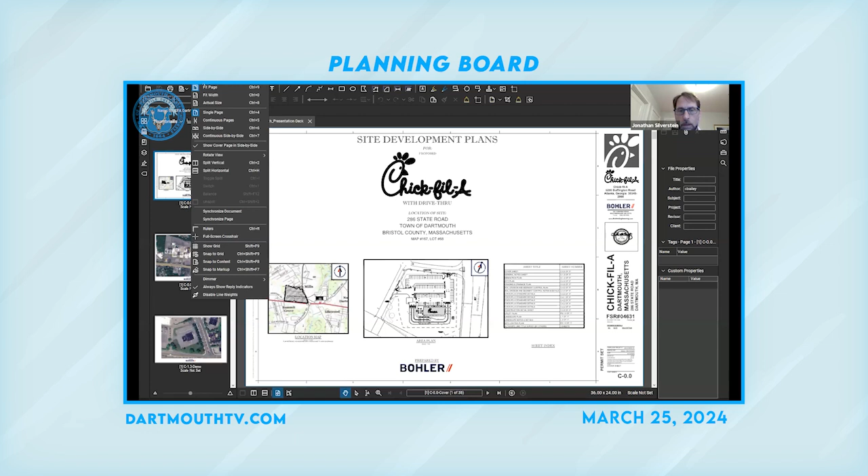The proposal is for a just under 5,200 square foot Chick-fil-A restaurant. It's going to have a drive-through. The drive-through has been constructed in excess of all of the standards set forth in the bylaw for design of stacking lanes and the rest of the requirements. The project will have 62 interior seats and 24 exterior seats, and as proposed, there are 87 parking spaces.

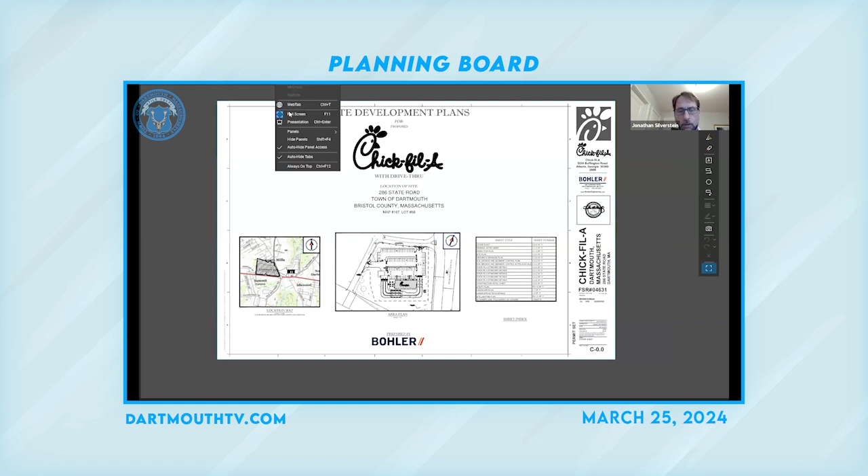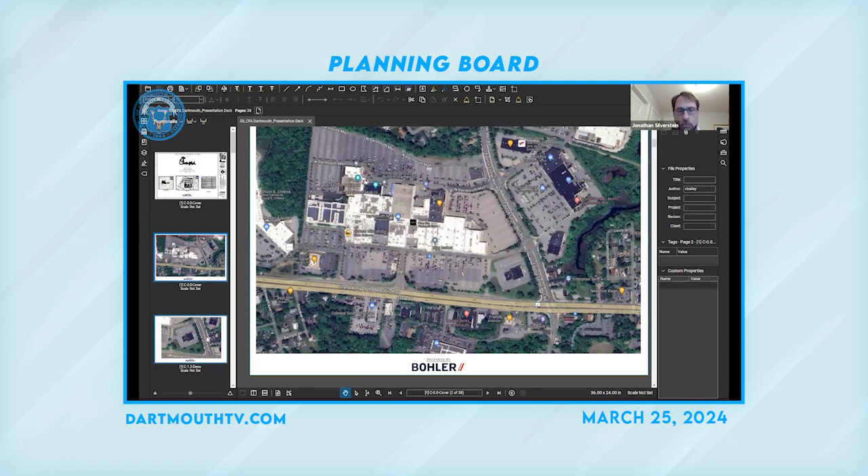The site is substantially covered as it stands with impervious area, and there'll be a significant reduction in impervious area as proposed, and Joey will run through that when I turn it over to him.

I know we did receive some comments, as Christine indicated, recently in terms of some of the performance standards set forth in the bylaw, setbacks for the site driveway, setbacks for some of the parking, and size of the parking spaces. I will note that all of those are existing nonconformities that are being significantly reduced. There's actually only one small, as proposed, extension of paved area in one corner of the site. Again, Joey will show you that, but by and large, that's multiple times offset by the reduction in impervious area as proposed.

So we know that this is the first of but not the last hearing session. Obviously, we're going to need to address some of the comments that we've received over the course of the past few days leading up to this hearing, and we're hoping that we can get some good feedback from the board tonight, and that will take us into the next hearing session. So with that, I will turn it over to Joey to run through the plans.

Great. Thank you, Jonathan. Again, my name is Joey Fonseca. I'm a project manager with Bohler. So I'm just going to take you through, Jonathan's already hit on a few of the points here, but I'm just going to take a little bit deeper dive into the existing condition, switch over to the proposed conditions, run through our proposal, the improvements. I'll kind of run through some of the architectural drawings that we have for the building, and then I'll end it by kicking it over to Maureen LePayton with Bowman to review the traffic portion of the site.

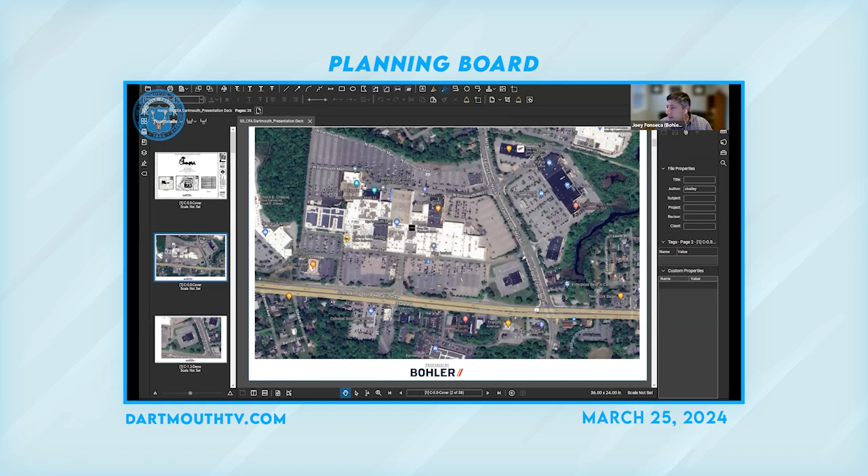So what you're looking at is just an aerial. You're all probably pretty familiar with the site. This is the Dartmouth Mall centered here on the screen, and our site location, I'll just highlight it here, is in this lower corner, on the corner of Faunce Corner Mall Road and Route 6. This is just a more zoomed in GIS picture of the site, again with the building, existing former Sears auto building here with the existing parking, again at the corner of State Road and Faunce Corner Road.

So as we mentioned, it's a former Sears auto site here. It's currently improved with about a 13,000 square foot single story building. It's a pretty large building, and parking field.

The existing parking within this parcel is about 103 parking spaces. We'll note that they're all roughly 9 by 18 parking stalls. Some are less than 9, some a little more, but I think it averages out to about 9 by 18 across the board.

There's 2 existing full movement driveways that currently service the site. One is on the west side that gives access to the interior ring road to the mall. The other, on the northeast corner, is another full movement driveway leading out closer to Faunce Corner Mall Road. Those 2 curb cuts, as you'll see in the proposed condition, will remain and just be slightly modified, and I'll get more into that during the presentation.

The grades on site are generally flat. It does slope from the northwest corner to the southeast corner. Grades outside of the paved area are pretty steep. This intersection is quite a few feet higher than the actual parking surface, and then it slopes down towards Route 6, and the roadway slopes down towards Faunce Corner Mall Road from this intersection at the northwest corner.

There is a section of the site within the Zone 3 aquifer overlay. It was shown on our site plan, though it's not highlighted on this plan, so I'll just draw it in. It encompasses this corner of the parcel, just so it's easier to see on screen. We're staying completely outside of that aquifer overlay with our proposed development, and you'll see some overlays showing the pre and post conditions and where the proposed improvements are relative to the existing improvements out on the site.

So as I mentioned before, everything in gray here is pavement that exists on site, with the building sort of being centrally located. It accounts for about 34,000 square feet of impervious coverage that currently exists out there.

Utilities are all serviced via mains within the mall, as well as the sewer line heading out towards Faunce Corner Mall Road and tying into the sewer service within that street. So all the other utilities are coming in mostly from the mall side, and then you've got drainage that is some collected on site and then sent off towards the southeast corner of the site.

Eventually it conveys stormwater towards the Paskamanset River that's off-site. Ultimately, that's where all the stormwater from this site, as well as a portion of the mall, conveys stormwater to. So this site has its own stormwater on site that discharges and gets conveyed off-site. It also has stormwater that is off-site, from the mall side, that passes through our site. Again, everything gets conveyed off-site towards that southeast corner of the site.

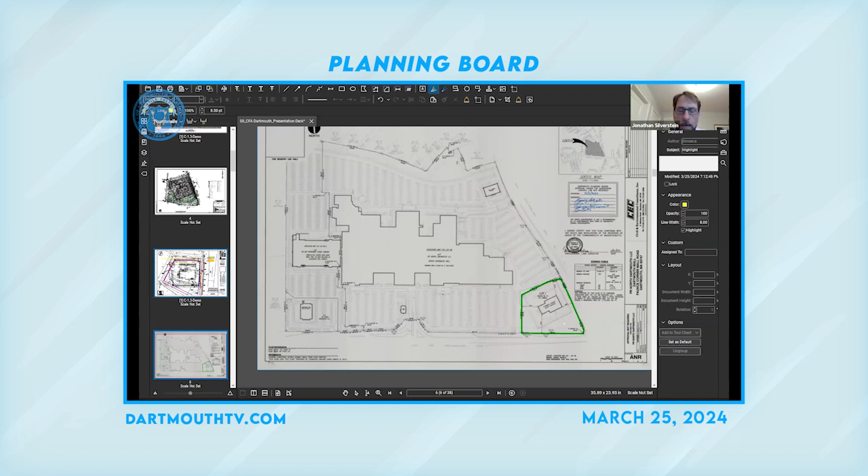Obviously, the board approved an ANR plan, which Joey's showing here. The ANR plan created this new parcel on paper, but all of the land is still in common ownership, so for zoning purposes it would not be considered a separate property. I think we weren't involved in that, but the landlord probably just did this to make it easier to identify the leased premises. For all intents and purposes, it's no different than any other part of the mall property, and it's still considered a single lot for zoning purposes, since you can't, through an ANR plan, create zoning nonconformities, which is what that would do.

Showing the creation of a lot that would result in zoning nonconformities means those are zoning nonconformities only in theory, and the courts have held repeatedly that those nonconformities don't actually come into existence until that lot is sold into separate ownership. So I just think that's a relevant piece of information for the board to have.

Thank you. So I'm going to switch over to the site plan now. We'll zoom out a little bit. This is just a color rendering with an aerial background so you can see the surrounding area and how this ties into it.

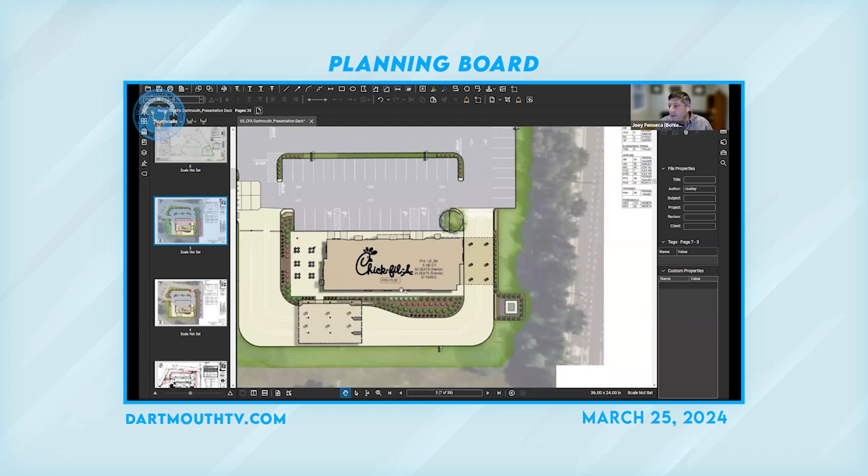Under the proposed conditions, the existing Sears building and parking areas will all be razed. We're proposing a new Chick-fil-A drive-through here, with a footprint area of about 5,200 square feet. The building is somewhat centrally located on the site, actually close to where the existing building is, just south of it. So where the existing Sears building is, in this front parking area right in front of the building, we're just south of it, generally in the same location.

The restaurant will contain 62 interior seats and 24 exterior seasonal seats. There'll be a patio on the left side of the plan for some seasonal seating. There'll be a 3-lane drive-through entrance which merges down to 2 lanes—3 lanes for ordering, then 2 lanes for meal fulfillment or pickup. We can run through that operation as well, but just wanted to highlight some of the features of the new plan here.

The parking field out front is designed for about 87 parking spaces. It relatively follows what the existing improvements were, although we've really reduced the impervious coverage here and brought in the site quite a bit to allow for additional landscaping in the parking area, whereas today this is all just one big paved area. I'll have an exhibit showing the difference, but we really wanted to introduce some additional landscaping here, knowing the site was mostly paved, which will also help on the stormwater side.

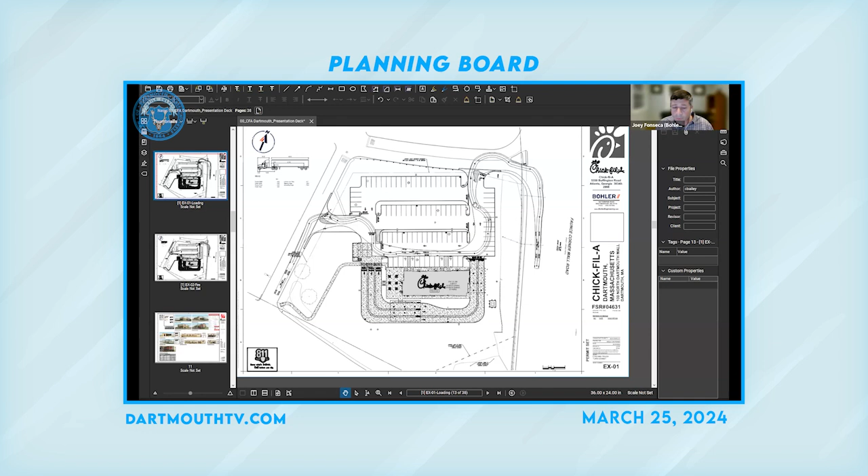Trash pickup and deliveries are all done off hours, so navigating through parking stalls won't be an issue, as they'll be operating when the store is not open, so there won't be any cars within those parking stalls — they'll be able to freely move through the site and exit. We also have, per the request of the fire department, they provided the specs for the fire truck, and we're showing a fire truck turn movement through the site — plenty of access to the building — and then exiting out onto Faunce Corner Mall Road.

Architecturally, I'll bring up the renderings that we have for some perspective views on the building. Let me just zoom in here. So these are just the various perspective views of the restaurant, showing color and the materials. This is the meal pickup side here on the top left — this is the canopy over the meal delivery area. This is the front of the store, we've got parking here, and this is the back side of the building. As you come around, these are the two queue lanes in the rear as you head towards the meal pickup area. Again, this highlights the back corner and the front corner here where the patio surfaces are for the outdoor seating.

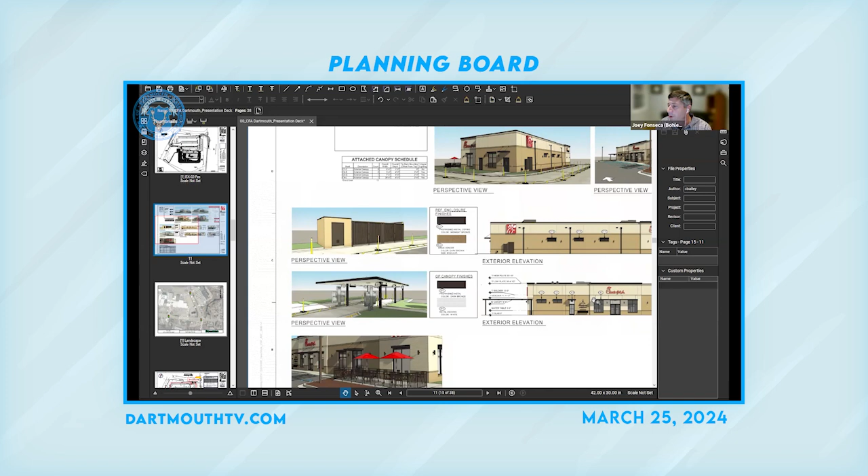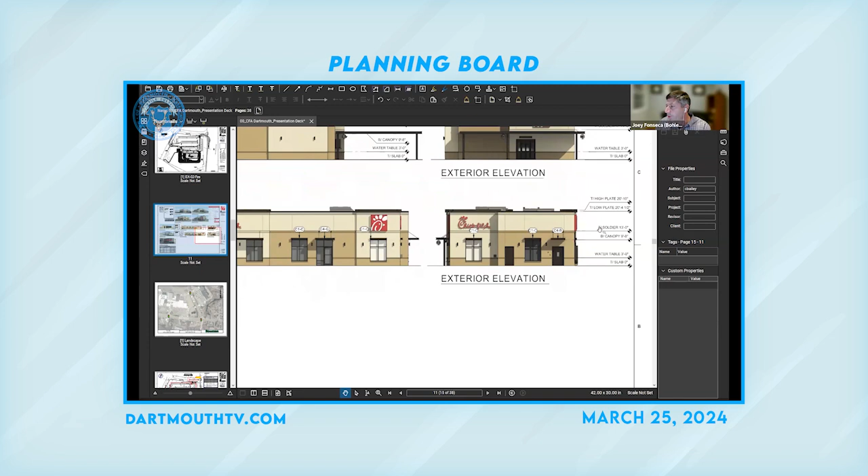It's a perspective view of the trash enclosure — probably one of the nicest trash enclosures you'll see. It matches the architecture, the brick, and the color of the Chick-fil-A building, so it will match that same look and character. And then again, just some renderings showing the order board pickup canopies as well as some additional exterior elevations for the restaurant. It's got an overall height of just under 21 feet. It's a single story building, so well within the height restrictions here.

I think that's really it from an existing conditions and site plan perspective. What I'd like to do is — I know that we've received comments through the portal — have Maureen present the traffic side, and then we can open it back up to questions, because I do have some exhibits to share that might answer some of those questions that came through the portal. So if everyone's in agreement, I can kick it over to Maureen and then we can wrap up with some questions.

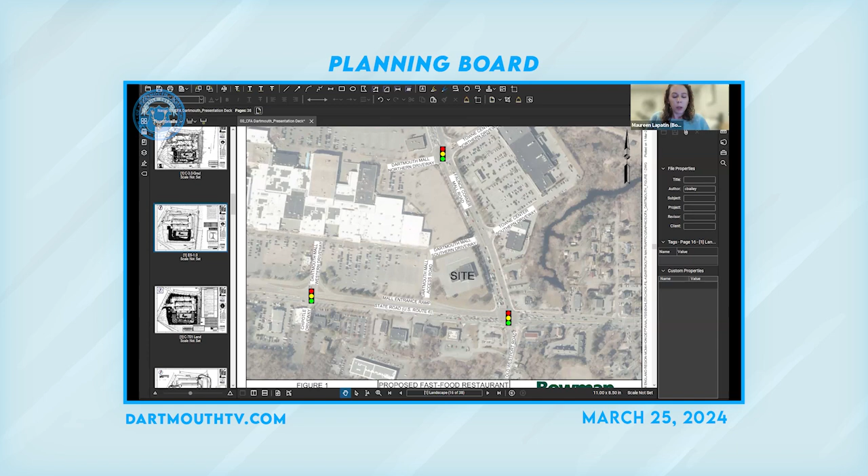We then use these base volumes to analyze our 2024 existing conditions, and build off of that to develop our future no build conditions and our future build conditions with the project. To determine our future no build conditions, we continue to grow those existing 2024 volumes based on a background growth rate. We used a background growth rate of 1%.

It's a fairly conservative growth rate. We confirmed that with the regional planning agency. And then we grow that over a 7-year timeframe in accordance with the MassDOT standards for traffic impact studies. So our future no build and our future build conditions are a 2031 traffic volume.

To develop the future no build conditions, we also take into account other planned developments or roadway improvement projects in the area that would be expected to impact operations at any of the study area intersections. We had coordinated with the planning department to determine if there were any other planned development projects in the area that would impact traffic operations.

Based on our coordination with the town planning office, there weren't any other planned developments within the study area, but we did identify the Mass DOT project on State Road between Faunce Corner Mall Road and the end limit, which is just off this screen at Hathaway Road.

That project is at the 75% level of design currently. And based on our coordination with Mass DOT, this project is currently planned for federal fiscal year 2025. So it would reasonably be in place before this project could be constructed and opened, or under construction anyway.

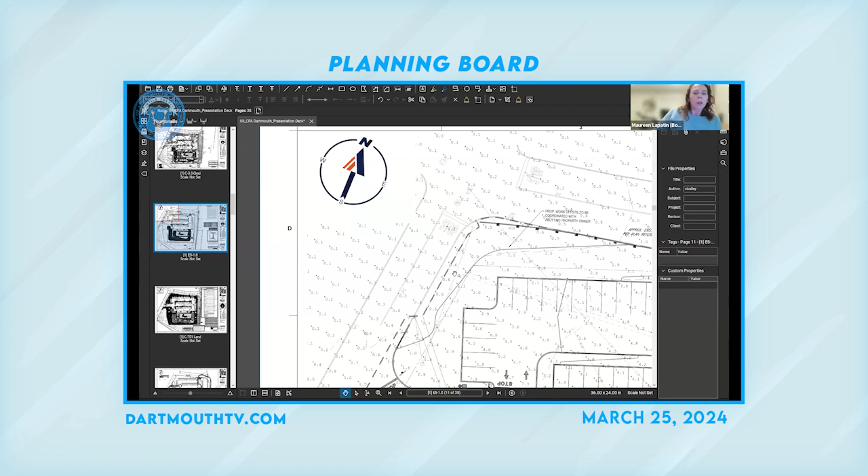Sorry, I was muted—thank you, Maureen. One plan I wanted to share that I hadn't shared yet is our overall lighting plan. We are proposing some pole-mounted lights within the parking area to sufficiently light the parking area. There's obviously lighting around the building, and some recessed cans within the canopy, so the drive-through is well lit, and our parking area is lit toward the minimum standards for parking area lighting, making sure our driveway curb cuts are well lit, and certainly within the site as well. I just wanted to make sure everyone was aware that we did have a lighting plan developed for the entire site, certainly within our improved areas.

That being said, I'll turn it back over to Jonathan for anything additional, and then we can kick it off to any additional comments the board wants to discuss tonight.

Thanks, Joey, and thanks, Maureen. I think that pretty much sums up the overview of the project. Again, this is really part of the overall mall property, and from a zoning standpoint, the ANR plan that the planning board endorsed doesn't change anything in terms of how it should be considered for zoning purposes. The landlord, if it ever wanted to sell off this individual parcel, would have to get zoning relief before doing so.

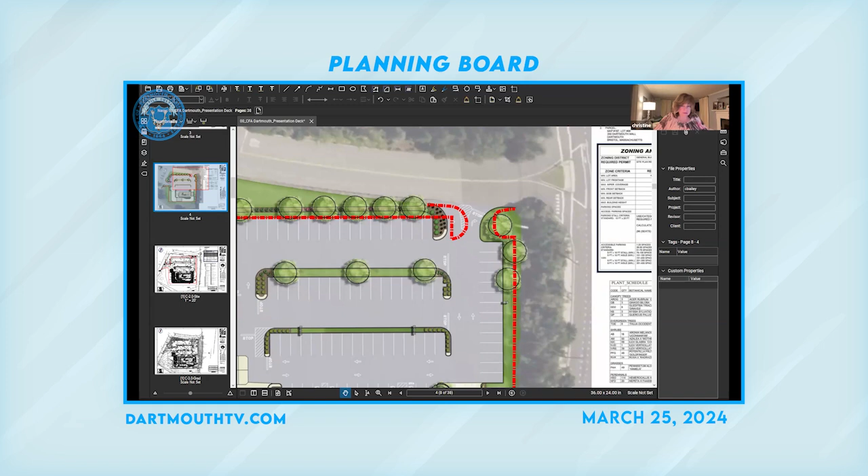You obviously show the stacking, but I was wondering if there was any consideration given to a bypass lane, in case somebody gets trapped in the drive-through there and needs to get out, if there's any consideration to that.

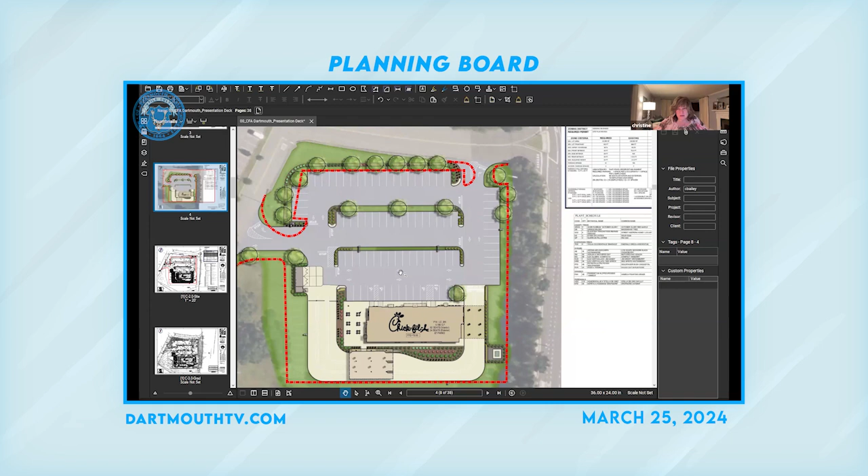One of the other things, I know what you said the existing parking spaces were, but if you're going to do work to the site, has there been any consideration to making them the standard now, which is 10 by 20 instead of 9 by 18, whether or not that was a consideration you were taking into account.

Since you have an overage of parking, I know you're interested in clearing out, and I think it's very wise to do some of the landscape along Faunce Corner Mall Road. I just want to point out that the town DPW director serves as the tree warden in this case, so he can work with whoever to determine which trees should remain and which can go within the right of way especially, because that is a concern to us, so we don't end up with something just generally cleared that we weren't anticipating.

As far as I know, the Board of Health, I had initially thought they were going to have concerns with regard to the trash. They don't seem to have concerns, and you've adequately explained that your pickup and loading are all off hours. So if you provide us with your hours of operation, or whatever you're proposing, that will solve that problem. I know they had also asked about what some type of water on plan 15 is, a shed with water, so they wanted an answer to what that is exactly.

DPW, you addressed the stormwater permit review, so you'll be working with them. They do the stormwater review on behalf of the planning board, so the board will ultimately be looking for that. The conservation agent, the environmental affairs officer, had wanted to find out about the discharges to the Paskamanset, because all of the drainage from the site ultimately goes through your site. So they just want to make sure it's noted on the plans accordingly, and you'll work with DPW and conservation on that particular piece.

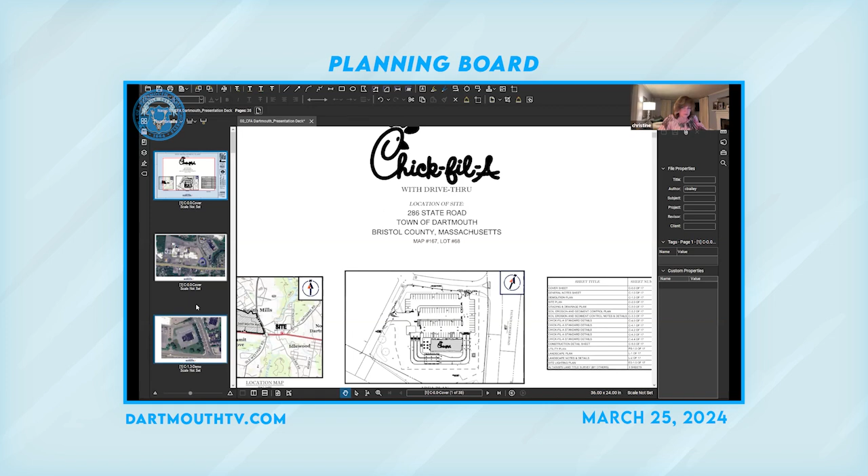I guess the only other thing was, we usually want a list of the waivers being requested on the front cover of the plan set, so that it stays with the plan set. And then the other thing I should point out to the planning board members is, because this new site was created, there was a new address given for this site, so it's not North Dartmouth Mall, it's actually got a state road address, as they had pointed out earlier. And again, that all ties into the fact that we thought the property was going to be sold. So those are the biggest things that I see.

Okay, Joe, can you do me a favor? Can you explain to me what the biggest challenges were when the owner, or the proposed investor, comes to you and says, this is what you got, work with it? I'd assume you've worked on these sites for Chick-fil-A in the past. What were the biggest challenges when you looked at this site?

Well, for one, it was access to the site and parking layout, and where the building needed to be for the drive-through operations, making sure we had enough stacking inside the site to not spill into drive aisles. We were limited, and we looked at many options on this site for where to site the building. Earlier in the process, the landlord had shared a document limiting us to where the building location, or building envelope, could be on the site. That forced our building further south, so the proposed footprint we're showing fits within that building envelope.

We had initially looked at an option where the building was closer to the north side of the site, with more of a counterclockwise layout, essentially mirroring the whole site. When we did that, we saw that, for the Chick-fil-A program, we want to make sure our drive-through operates per their standard prototype. This layout gave us the opportunity to really queue and get a good stack within the site, keeping customers within the drive-through lane and not spilling out into drive aisles, like some of our older sites where we weren't designing for these longer queue lanes.

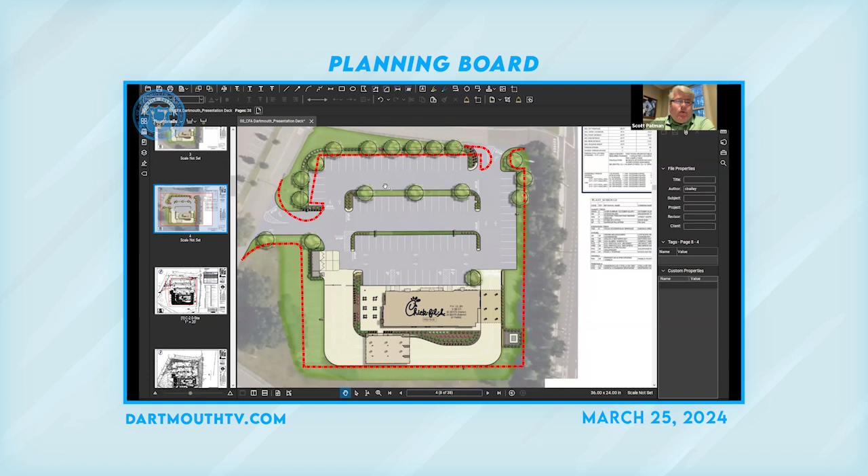That will answer one of your questions as well. We're doing a long-term ground lease with the mall, a 15-year ground lease with a lot of 5-year options to extend. There's no right to purchase in that agreement, so it will be a long-term ground lease. As with other leases, we oftentimes have certain restrictions on what we can and cannot operate, but those are very limited here, more centered around being isolated away from the mall. I could certainly get some of those for you if there was anything of concern.

Is there any restriction from the mall, Scott, that if we had overflow parking and people started to park in the other sections where the other tenants are in the main building, are there any restrictions there that would cause problems? In other words, do we have cross parking? I need to go back and look. Normally we would require cross parking here, but I want to make sure, since I wasn't the real estate counterpart here. I'll go back and look for sure.

If you can get us a little bit of information on the availability of overflow and any restrictions to this particular site for you from the mall ownership. I'm going to open it up to the membership if anyone has any questions at this point.

Chris, go ahead, you haven't asked this? All right, thank you, Mr. Chairman.

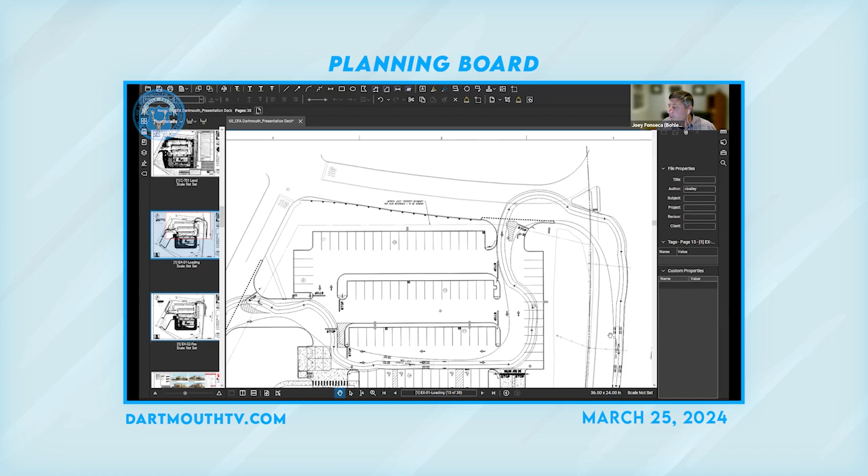So what Maureen and I were discussing last week was that we could have possibly a 3-foot wide mountable concrete island here that would extend beyond this, right onto the site, to again limit that turn. I think it would only be potentially 4 inches high.

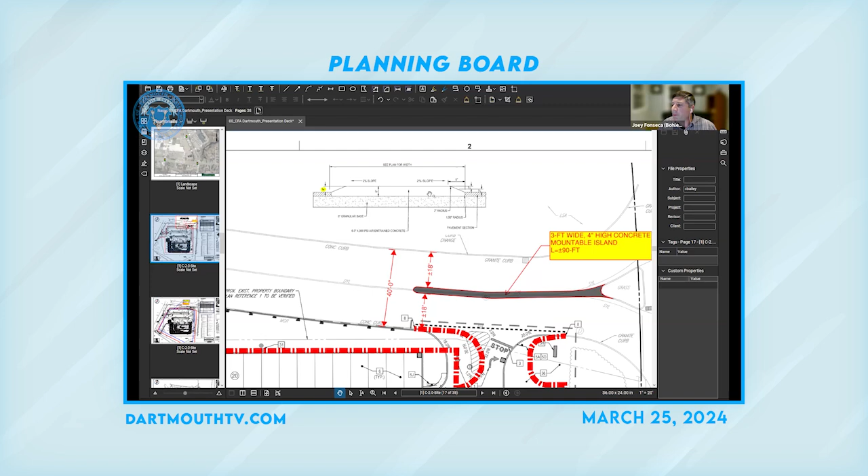This is a quick detail of what we've done on other sites. It's just 4 inches high, not a vertical curb. It's a mountable concrete island, but it will deter customers from taking that left turn, while also giving a fire truck apparatus or delivery truck apparatus the opportunity to still drive over that island as they make that turn and exit out onto Faunce Corner Mall Road.

Okay, but the intent is for that cut to be exit only, right? Correct. So this would restrict the left turn into the site and also the left turn out of the site. Okay.

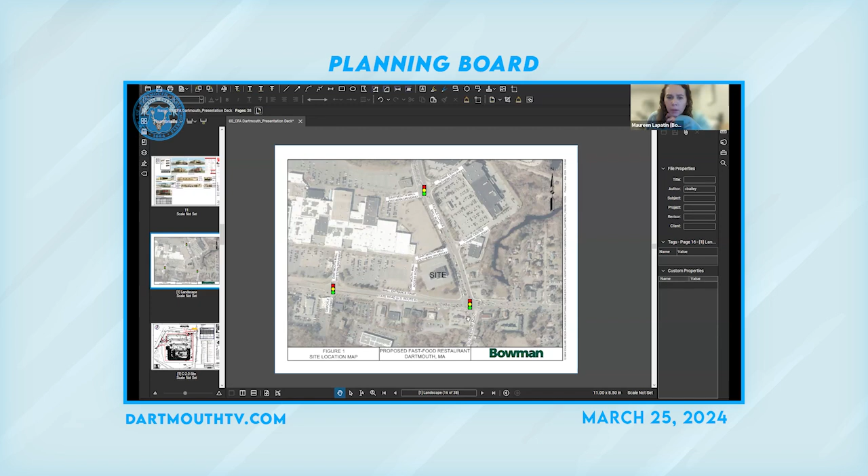Curiosity question for, I think it was Maureen from Bowman. Did Bowman do a traffic study for a similar application just down and around the corner on Route 6 and Tucker Road? I'm not familiar with that study you're speaking of personally.

Okay, because I think it was a Chick-fil-A. I'm not sure if it was the same entity we're dealing with today here. I was just curious. Not familiar with that specifically, I don't think. That was KFC, Kevin. Oh, KFC, okay, sorry, my bad. That's okay.

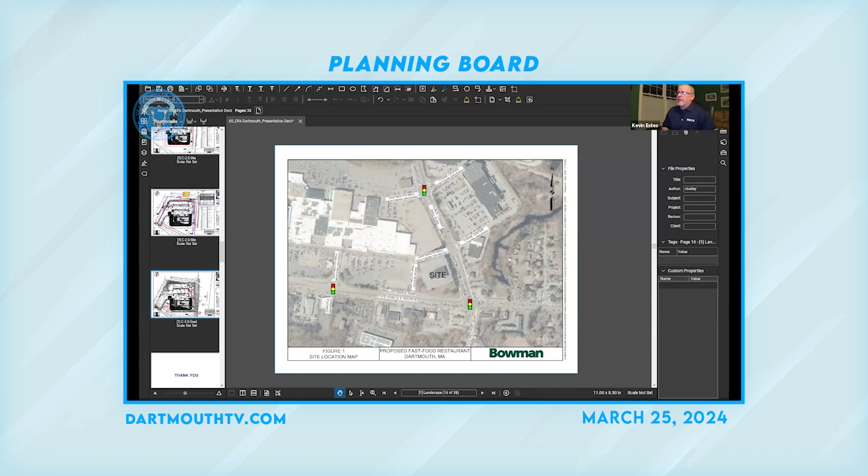So can you talk a little more about, besides the fact that we understand we're starting in a bad place in terms of impervious cover, and we appreciate the efforts to decrease impervious coverage, other than decreasing the impervious cover itself, are you taking any other water runoff mitigation efforts that don't currently exist there? I thought I heard you refer to some mitigation efforts beyond just increasing the pervious cover.

Yeah, so as part of the review with DPW, they wanted us to maximize on-site infiltration here as well as water quality improvements. With this site having a lot of utilities running through it, we faced some challenges on where we could potentially look at infiltration or subsurface infiltration, or even any surface infiltration like a surface basin. The grades here are really steep.

It's about a 10-foot grade change, and it's all dropping down towards Faunce Corner Road. What we've done here, by reducing the 14,000 square feet of impervious coverage, is get some additional infiltration there, reducing stormwater runoff. What we're working on now with DPW is isolating—

This is really confusing, but I can clarify what this means. We're isolating the proposed drainage improvements and keeping the existing drainage improvements as they are, because currently, even though the plans don't all jive together, there are some offline water quality improvements installed here. I don't know when, but there are some offline utilities here, and we want to make sure all of that is maintained—some coming from the mall, and some coming from drainage collected on site.

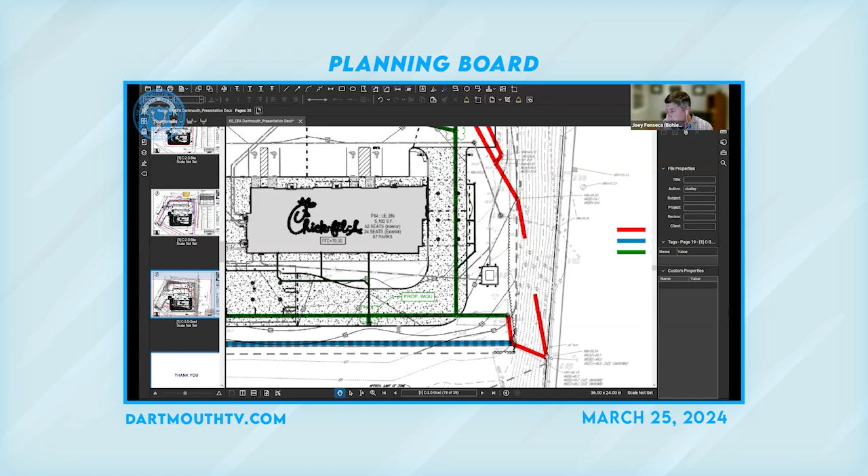So in red here indicates where the existing drain lines are through the site, coming from off-site into the site, being combined with other drain lines into manholes, and then everything is directed off-site into this bottom southeast corner. This portion is the larger 48-inch drain line that essentially, if I were to draw a line connecting these two, does this today. Knowing that we've got a building foundation footprint here, we've got some canopies and some footings for the canopy.

We didn't want to be excavated near that line. It's a pretty large line, 48 inches, with maybe only 3 feet of cover over it. We're proposing to relocate that line just south of our development to make sure it's out of the way. It's a large pipe, and we want to get it out of our way, and it's not impacting runoff rates or anything. We're literally just taking that 48-inch line and moving it south.

We're not changing any catchment areas. On site, as I mentioned, there are some existing drain lines coming into the site, combined into a manhole and then heading off site.

These areas here, where you've got this kind of offshoot, it's not clear through some of the plans we received, but I believe there's a water quality device here that's taken offline. There's a weir inside this catch basin, inside this manhole, that allows some of the smaller storms to direct towards the water quality device, get its treatment, and then it ties back into the system. Under the larger storm events, it's going to mostly bypass this and just head straight through the site and off. I believe that's how they were designed.

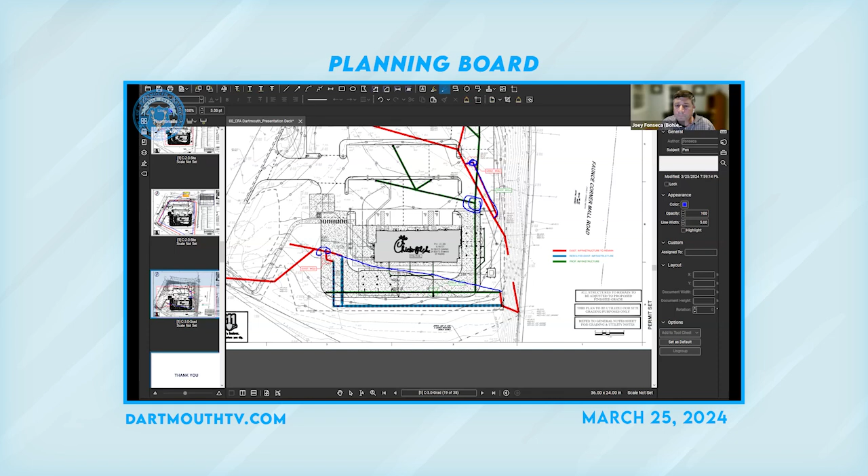Okay, Christine, so we're not deciding anything here because these aren't final plans. So I assume we're going to review this again. Yes, you're going to see this again. Okay, great, thanks. I mean, I assume that's where you'll all vote.

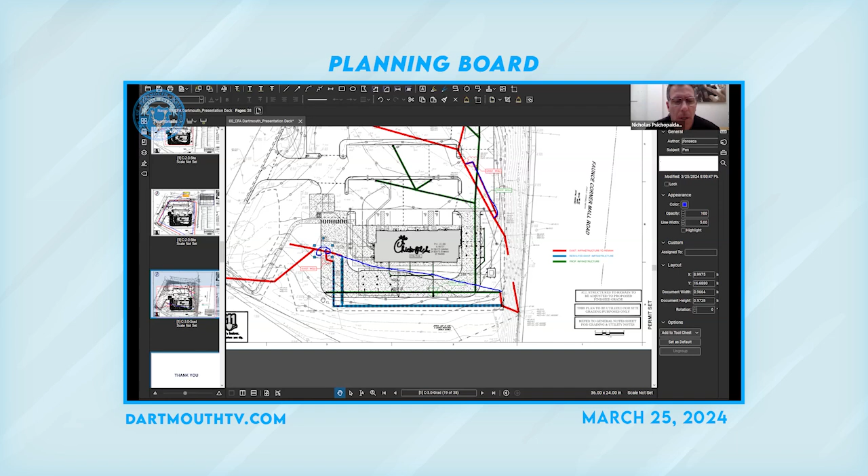May I ask a traffic question? Margaret, before you go — Nick, Margaret. Thank you, Mr. Chairman, I have a couple of questions.

I'm one of the members of the planning board, and I was thinking that perhaps you might have parking for a large bus. For instance, Coastline Elderly sometimes takes their people out for lunches, and some of the elderly from New Bedford and all — I know everybody's going to want to go to Chick-fil-A. So I know you have enough parking, but I'm wondering if you could designate one spot for parking for a large bus. That's one question. The other question I have is, is this a company store, Scott?

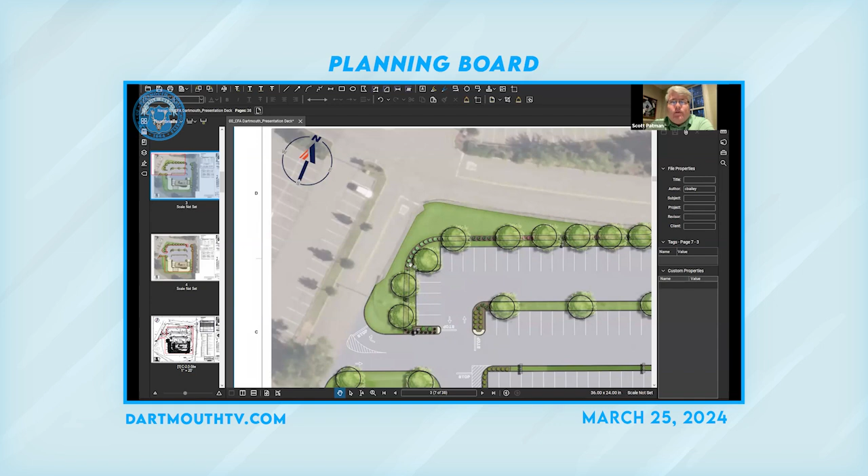So none of our restaurants are company stores. They're all operator driven. We call them operators, owner operators, but they're franchisees. We've got a unique model in that the corporation, Chick-fil-A Inc., does all the real estate and building improvements, and then we select operators to come in and be our franchise partners. It really is a truly unique model.

One of the things our founder did years ago when he started was he realized it's really too hard to run more than one or two restaurants. So we limit that. Across our chain, no operator has more than 3 restaurants. There are a number that have 2, but the majority of our operators only have 1 restaurant. The intent is that they're in the restaurant running that business and being part of that community, having an impact on their team members and their customers. So that's really the model.

We're also unique in that other franchise concepts have a huge cost of capital to get into those opportunities. With our opportunity, once they're selected, they put down a $10,000 deposit, and then we help them get trained up, staffed up, stocked up, and ready to open, and then it's their restaurant to run. So those are 2 of the unique model points.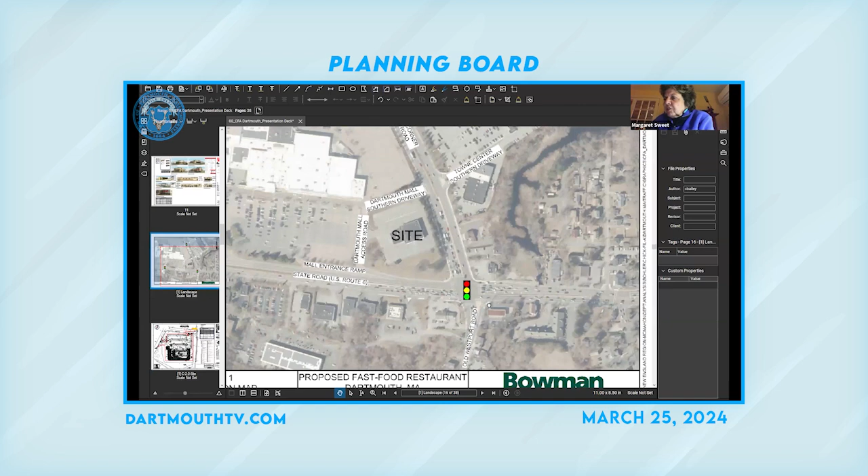Thank you. I have a question for the traffic study. That's a horrendous corner of State Road and the Faunce Corner Mall Road. And I'm wondering, have they done other hours of operation? In other words, sometimes between 2:30 and 3, because I'm out a lot driving, you can't even get through. Have you studied other hours, or are those just the peak hours that you picked up?

So when we do our peak hour counts, we could do several kinds of counts, but we typically cover several hours in the morning, midday, and afternoon, so we can determine, say between 4 p.m. and 6 p.m., or between 6 a.m. and 9 a.m., what the specific peak hour is based on the data we collected during that time frame. So we pick the one highest hour over a group of hours that we count.

From your traffic counts? Yes. Okay, thank you. And signage, we select the hours too based on anticipated peaks to the site as well. So Chick-fil-A does serve breakfast, but it's expected that the midday trips are typically the higher ones.

So for this specific kind of use, we would look at a weekday midday peak hour as opposed to earlier in the morning. Then we look at the weekday afternoon as well as the Saturday midday to align with those projects. What would your peak hour be during the week? Let me flip back to the traffic study so I can get that number for you quickly.

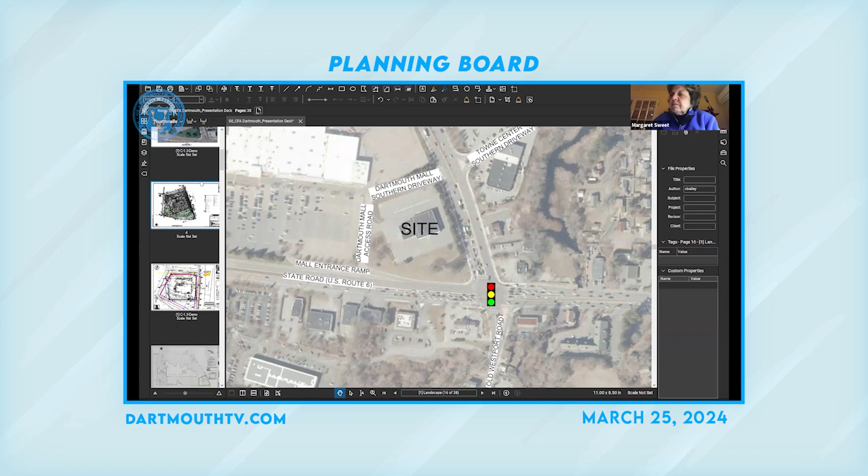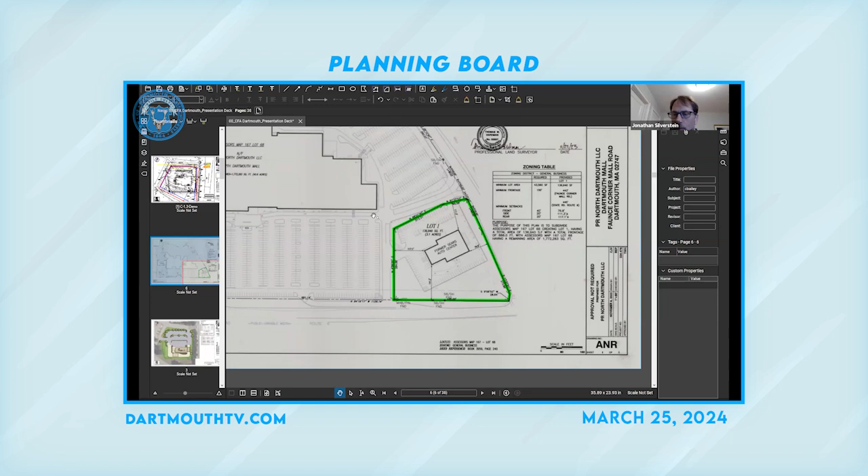I can make an educated guess just from having done this long enough. I think they were probably trying to do some of their own site planning, knowing this ground lease was going to be in place. I think it's significant that the line doesn't align with the roadway - it aligns with the existing parking in that northwest corner. So I think they were just trying to delineate the leased premises more than anything else. People do ANRs for all sorts of reasons, sometimes to get zoning freezes, sometimes to get a separate address. Maybe that was their intent - just so this could have a separate and less confusing address.

But we are aware of no intent on the part of the landlord to sell this parcel. And as Scott indicated, we certainly are not intending to purchase it - we're intending to lease it long term. Thank you, Christine.

Do you know if this ANR was recorded at the registry? Yes, it was. It was recorded at the registry.

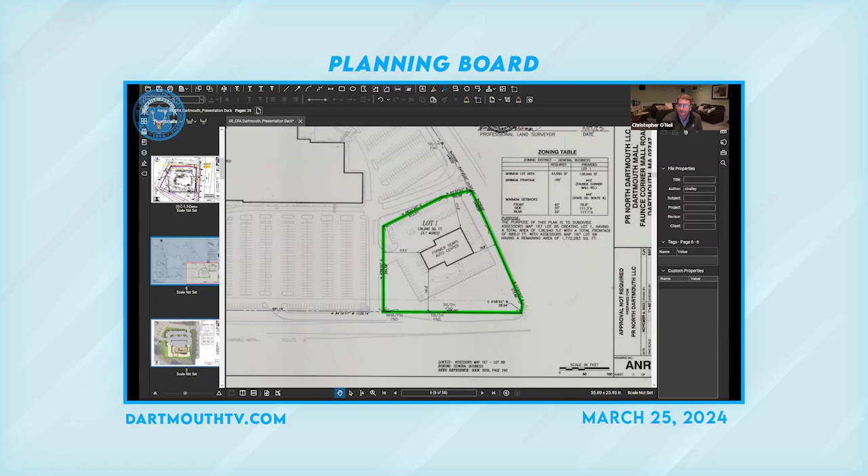Thank you, Myra. I have the book and page in the office if you want to look at it tomorrow. No, I'm fine - I just wanted to know if it was recorded.

Kevin, Nick, any questions? Yes, please, Mr. Chair. Oh, go ahead, Kevin. No, go ahead, Nick. You were next.

Thank you to all of you - appreciate the presentation and thrilled to see such potential enhancement of the site. In regards to Margaret, aside from the example she gave with Coastline or adult day services, keep in mind we've got 2 high schools nearby that commonly, multiple times a week, have a visiting high school bus or even a coach bus, and teams that travel look for food after the game. So you'll probably see school buses and coach buses on site in the evening hours, more common than not, based on the high school athletics and club athletics in our area. I'm only sharing that to support Margaret's request for bus spacing.

But my question was specific to simplifying the traffic study results, which was well revealed to us. I'm asking myself how I'm going to speak to the residents tomorrow when they approach me with questions. So I'm going to ask you a question to help myself: can you tell us how many vehicles you expect to access the site per day on average, to simplify the matter? And is there data that suggests how many of those vehicles, in count or percentage, currently use these thoroughfares on a daily basis, so we as planning board members can simplify what the traffic impact is going to be as we speak to residents? Quite frankly, as this presentation has gone on, my phone hasn't stopped beeping with questions about Chick-fil-A. Is there any way to share that information with me?

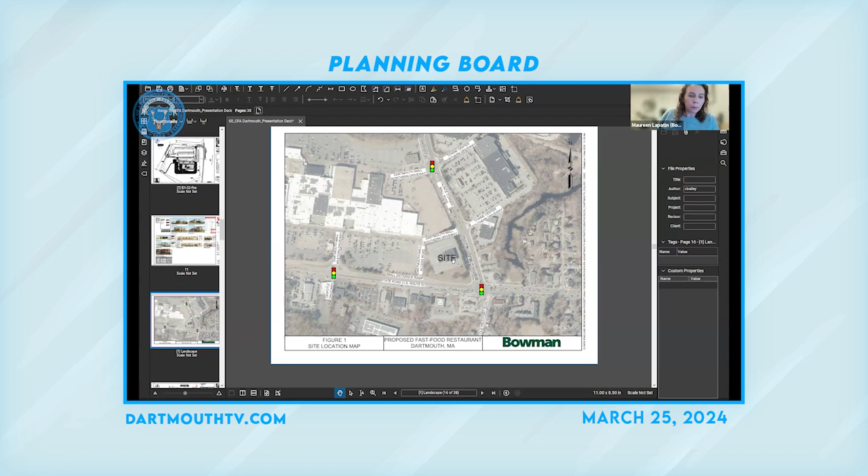For the trip generation, it's page 18. And for the distribution, it's page 24, figure 8 in our traffic impact study, called direction of arrivals and departures. That shows a percentage on the study area roadways of how much traffic already uses those roads, and that's how we determined primarily how to distribute those new trips. I believe all of that is in your packages.

I did not give them the whole study, just to give the planning board members, but I do have it if any of you want it. We were just trying to keep the package down, so we didn't give them all the appendices, but if you'd like it, I can distribute it to all of you on public access tomorrow. But you do have the pages that she referenced.

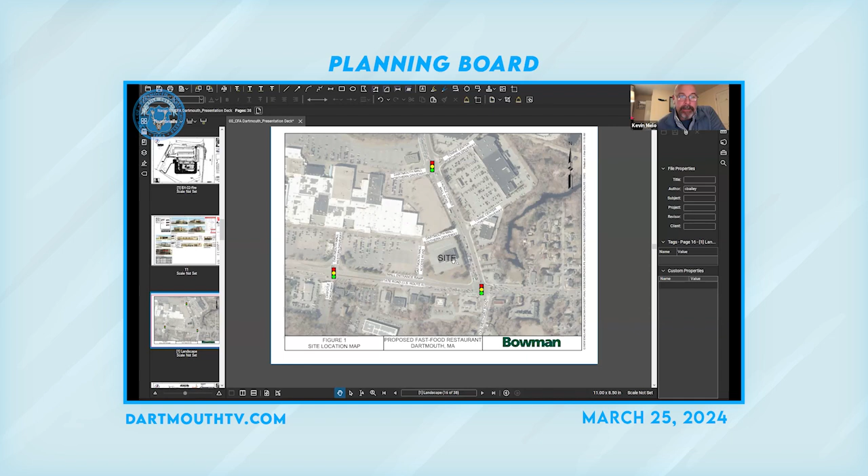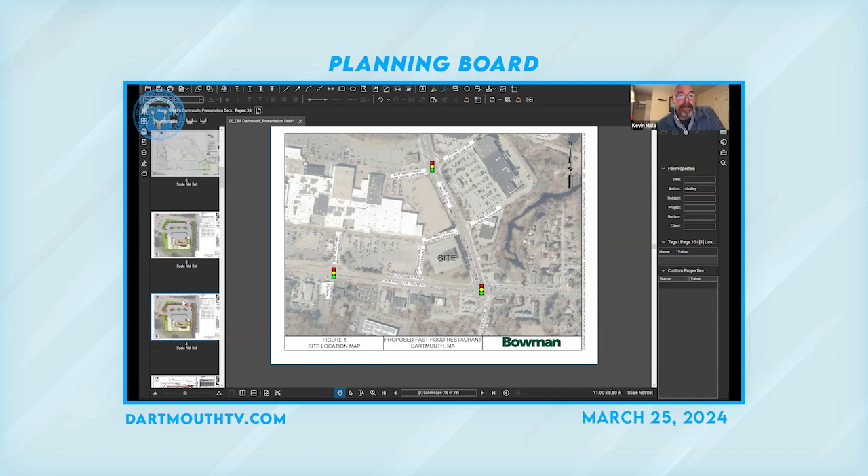Okay, so thank you. One thing I'm noticing about the plan that I'd like to see would be crosswalks marked from the front or the main entrance to the planning site. I don't know, did I miss that?

Yeah, so I'm not seeing crosswalks anywhere here. Right, so that was one of the pedestrian comments that we gave, but they haven't had time to respond to that yet. That is one of the requirements of Article 24, along with the bicycle rack, I would assume.

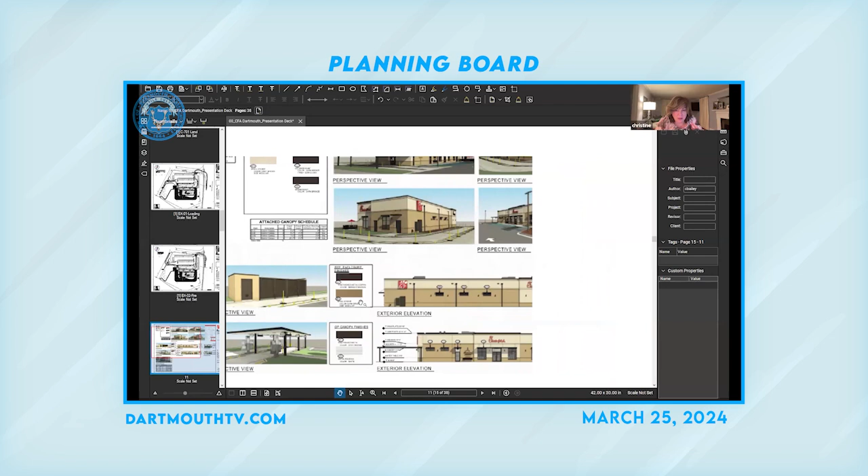Yep. And the other question I had is the architectural design standards for the town of Dartmouth. Has that been provided to the applicants? So that is available online. They did give us their standard concept.

We did not give them any feedback on that. I left that up to the planning board members, because they are just guidelines as to whether or not you're looking for anything in particular. Well, so that can be part of the feedback.

So I know when Friendly's came, when several other restaurants came with their quote-unquote corporate design, we did not just say, oh, okay, that's corporate, that's the way it is. I personally would be looking for some type of softening of these hard edges, if you'd say, on this building. I don't know what the other board members feel, but I think that's important, especially on such a prominent corner uptown. Everyone coming to UMass Dartmouth is going to see it.

And we did it with Bob's Discount Furniture. They gave us some peaks over the doorways, a little 3-dimension. I'm not asking for wood shingles or anything like that, like as if we were Cape Cod, but I'd like to see this building a little bit less boxy and a little bit more Cape Cod or New England style, something. I will forward the guidelines again tomorrow, the first time. They did not receive feedback on that.

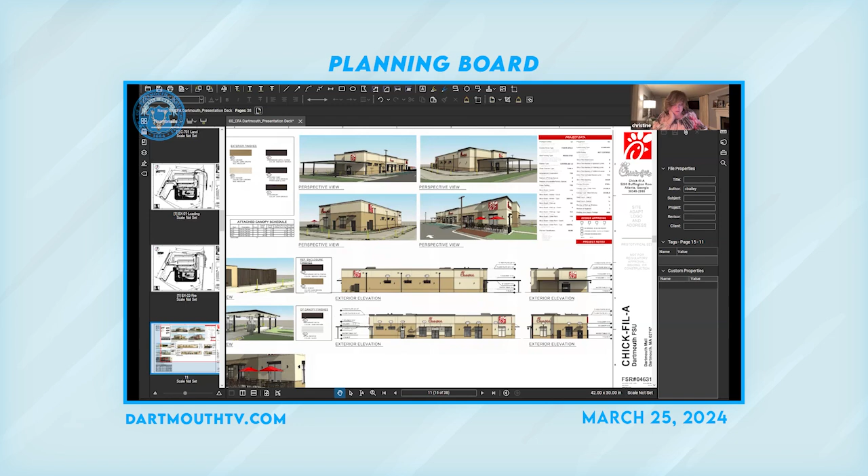Christine, the comments from the fire department, what did they have to say? The fire chief always refers to something in the site plan review regulations: provide a fire apparatus access plan, which includes an analysis and evaluation of fire apparatus maneuvers via the 2 access roads created by swept path analysis and turn simulation software. He also refers to 527 CMR 1 section 18.1.1.4 - aerial apparatus length is 40 feet with an axle to axle length of 21 feet 5 inches. Plans need to be revised to satisfy these concerns.

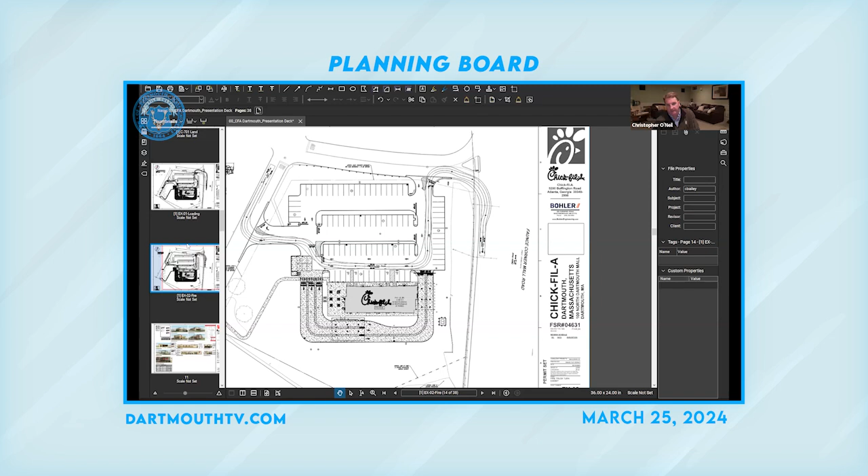This is pretty standard, what Chief Arruda gives every time, right, for everybody. Does this plan in front of us adhere to those standards? Not yet, Jonathan - these plans will have to be revised to include whatever the chief needs. The chief will be looking at it again when the actual building permit application goes through, and there may be some additional things that happen as a result of that review.

By the way, this was forwarded to the new building commissioner who started today, so he will be reviewing it and giving comments as well, I would imagine, over the next couple of weeks.

Joey, on that particular building layout, where's the kitchen? Which side is the kitchen on? The kitchen is all on the right side. The dining is on the left.

And just to add, this truck turn exhibit wasn't submitted as part of the original package, so this will get included once we have the revised plan set. So it's on yours, just not on ours - correct. And the chief hasn't addressed access to the rear of the building then.

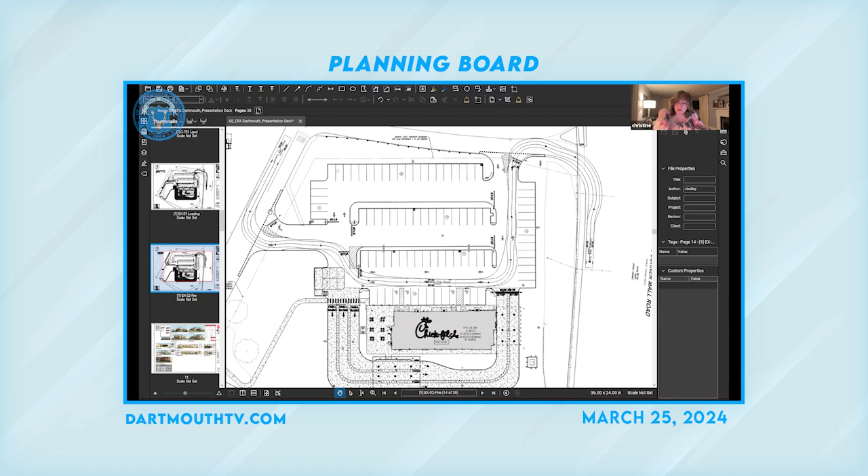No, he has not at this time. His comment is available on the portal, that's the only comment he gave us. I'm not sure if he was present at the technical reviewer meeting, I can't quite remember. Usually he does always give feedback and comments, so I can verify with him again.

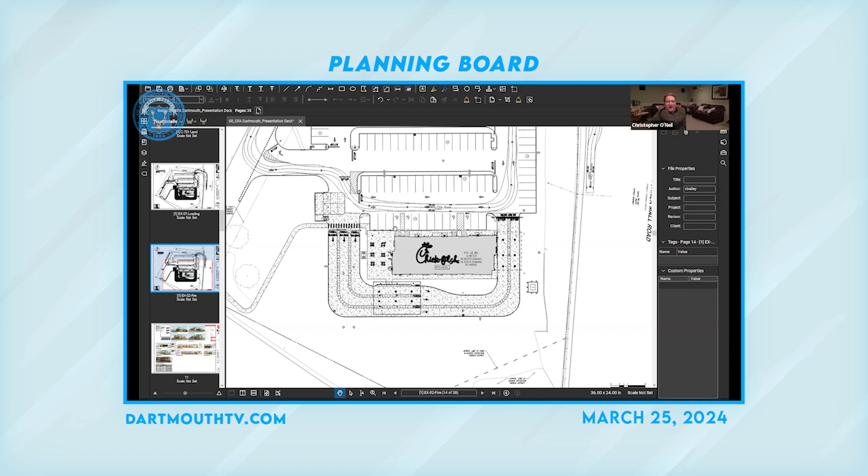Joey, the outside dining section - there's a few plans that show it being taken off. Is that accurate? There will be outdoor dining here. The final patio layout will certainly be firmed up because we'll include a bike rack in here, but there will be outdoor seating here.

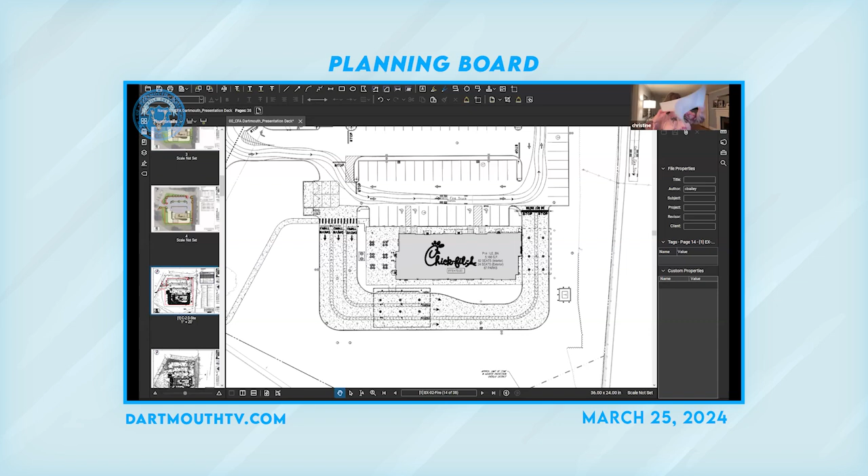It'll be enclosed with a fence. Are there any markings on the original plan about the outdoor dining? Let me see if I can find it. Not that I'm aware of - I wouldn't have requested that it be removed. I don't know where that came from. All right, hold on one sec, let me see if I can find it. Maybe it'll jog something.

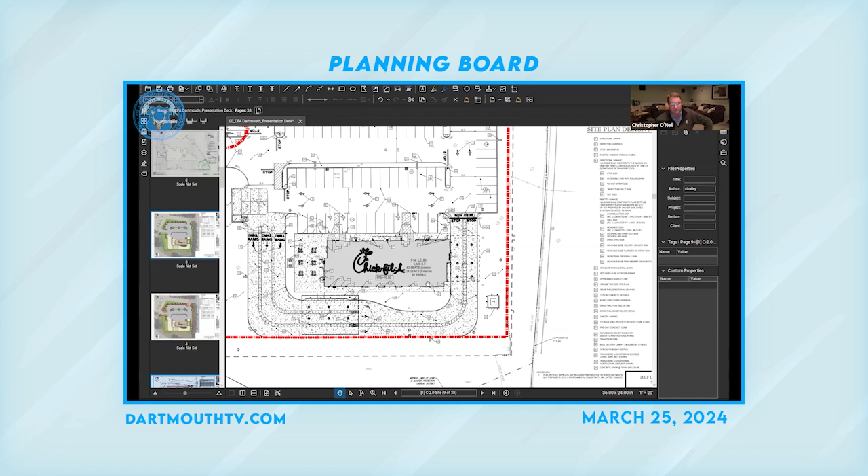Chris, can I ask a follow-up while you're looking for that? For this, please, thank you.

Actually, this is a perfect slide for this. The planters you're putting in, the two new cuts into the existing parking lot - are those going to be curbed so the runoff runs around them, or is the runoff going to run into them? The runoff will be running into them.

These two islands serve a couple purposes. One is that the current stormwater goes from northwest to southeast, as I mentioned before. We didn't want all the stormwater going directly towards the building. Knowing we couldn't get two full rows of parking in here, and getting some additional green space here, this allows the stormwater to be treated in sections so we can break up that stormwater flow currently going towards the building, and limit the amount of stormwater generated through the parking area heading towards the front door. So a portion of these curbs will act as gutters to direct stormwater to catch basins - the catchments are all located within the gutter lines. All right, thank you.

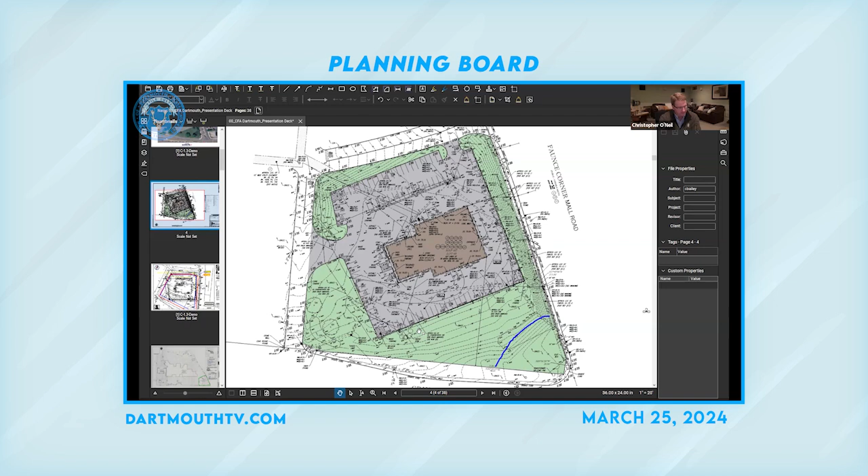I'll take a closer look at the fire regulations. The site, let's see, the southern view - right now there really isn't too much in the way of landscaping on that side, it's mostly grassland. Just looking at the pictures, I'm wondering if the backside and the drive-up area would be shielded with anything new. I didn't see much on that side when it came to the landscaping.

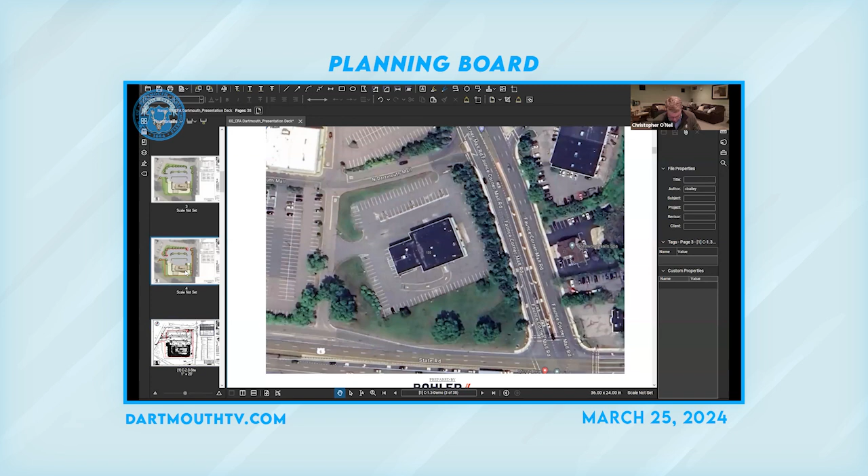In this area we were sort of limiting our landscaping just because there were some larger trees, just to not block visibility to the building. We can certainly go back to our landscape group and pass that question along to them if there's some additional enhancement they can do here to increase some of the landscaping there. Is there anything in particular, or just this zone in general?

What about the guardrails? Are you going to keep the guardrails, or swap those out for wooden, how are we going to handle that? That's off our site, our plan was just to keep that existing condition that's there today, the metal guide rail - we're going to keep that. Albeit a section would be modified at the curb cut, but yeah, that was to remain.

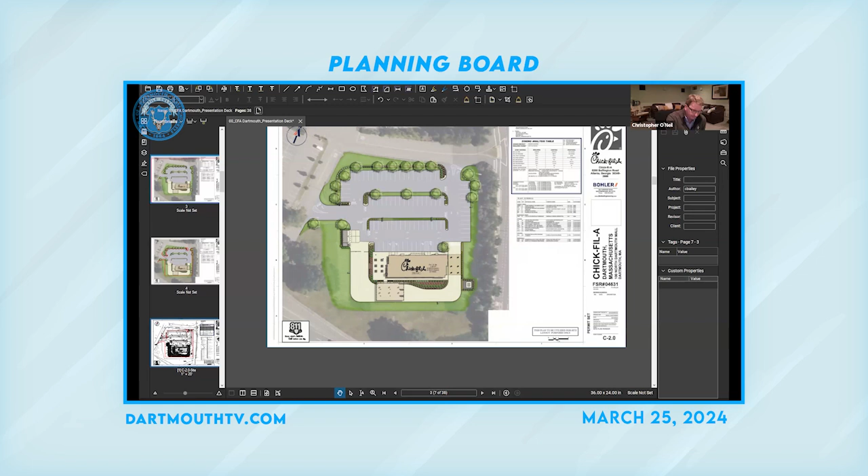Hours covered those. The exit only on the Faunce Corner side, I think you'll get into that a bit more. The crosswalks, bike racks - okay, I think this is a pretty good first viewing of the site plan. Any other questions, comments from the members?

Mr. Chairman, can I ask one question? Go ahead, Nick. I'm just curious, I realize the extent of work that's been done and all that's been presented so far, and it's greatly appreciated. I'm just curious, was the existing subsurface findings basically making the building's back wall, the drive-through wall, being on the easterly border on Faunce Corner Road, was it making that option prohibitive, period, or just less desired?

The only reason I'm asking is that as you turn off of Route 6 heading westerly on the access road and abruptly take a right, then another right onto the property, you'd be able to take that right a little bit sooner, more southerly. If your exit came off your property further north on that access road to the right, you'd have a stop sign, giving us a lot of control, probably 100, 150 feet or more, before Faunce Corner Road. Was that an option and less desired, or clearly not an option?

So if I'm hearing you right, it's pushing this driveway midway along the frontage? No, if the building was rotated counterclockwise and the southerly border was east over here on Faunce Corner Mall Road, the face of the building would face westerly, and both your entrance and exit would be westerly, allowing traffic to come in and off the parcel, servicing Chick-fil-A on this access road off Route 6. It would give us a buffer, getting your exiting flow moving sooner than where it is now, right before it gets onto Faunce Corner Road.

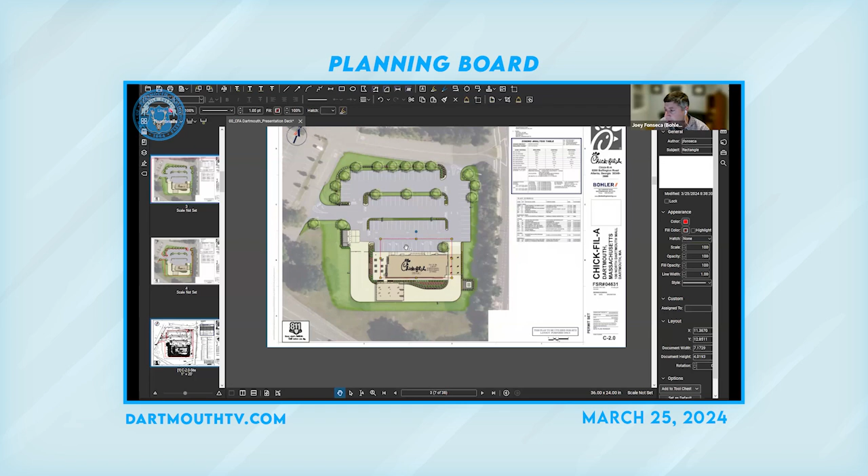One of the comments that came as we were developing our concepts from the ownership group, the landlord here - and I mentioned this before - is there's a building envelope. I believe the back wall was up against it. I don't have the plan open in front of me, but essentially they gave us a box of where the building could sit. We're holding that back edge of the building just to build out enough parking. That was our biggest restriction. We looked at multiple options, and ultimately we had to conform to having the building within that box, and that's how this layout was created.

And that box was determined and defined based on subsurface findings, or just a preference? I believe it's preference from the landlord. A lot of the utilities out in front of the site are more individual services - gas, water. The main 48-inch larger drain line coming from the mall across there cuts on the back side of our building, so it's not within this building envelope. Understood. We're relocating just because we've got other program elements here that we don't want in conflict during construction. All right, much appreciated.

So what I would say to planning board members is, as you move forward, remember our next meeting is going to be April 8th. That is the public hearings for town meeting articles. You can still do something at that time if you want, depending on when we get revised plans and everybody has a couple weeks to look at them. The meeting after that is the 22nd of April.

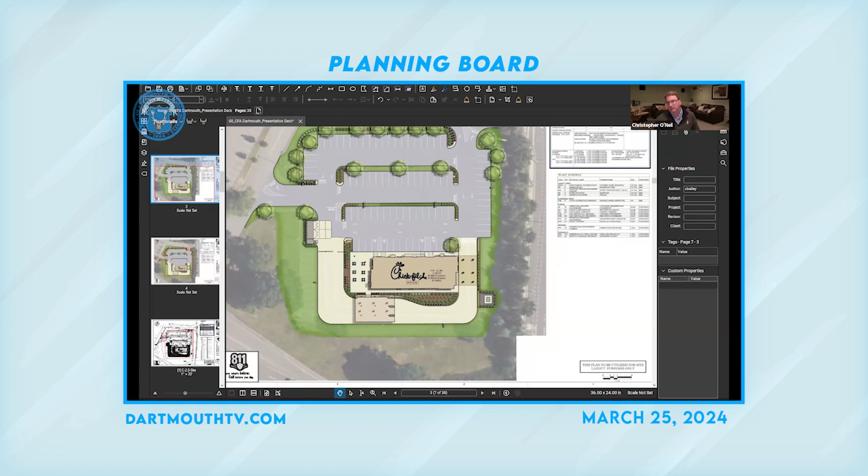Okay, let's see. My computer is real slow on this plan, so this might get locked. Let's see, number 2 on the agenda, site plan review, PSPR 24-6, 439 State Road, Assessors Map 166, Lot 137. We have a request to continue, Christine? Yes, that is correct. You have received another request to continue from the applicant's attorney on this one, Greg Coldis.

I have explained to him, as with the previous applicant, that I think April 22nd or May 6th would probably be best. So I don't know if you want to continue until the 22nd, and we'll see if they get us any plans or further information with regard to that.

Margaret had recused from the last one, so she will be recusing again from this one, I assume. Yes. What was the date that they requested? So they did not request a date, so I threw a couple of dates out to him. No response, so I'm thinking the 22nd is probably appropriate in this particular case. And as long as I let them know that's fine, if they really push to do it the 8th, we can make an accommodation and I can put them on an agenda. I think the 22nd is best. That sounds fair.